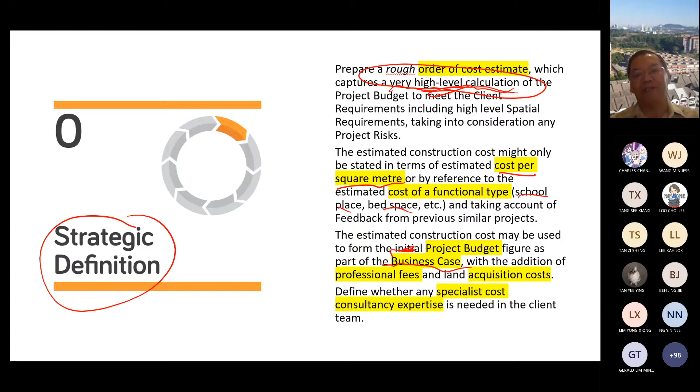What you need to establish is the business case—meaning whether the project can make money or not. That is the main consideration. This business case, also known as the initial project budget, is at the very initial stage, with the addition of professional fee and land acquisition cost, so your land cost needs consideration too.

Normally for a construction project, you need to employ consultants, so consultant costs have to be taken into consideration as well. I showed you this in the last lecture—a business case definitely has a gross development value, meaning the income, how much you can collect from the development.

Let's say a piece of land can complete 200 units of apartments, each unit worth 500,000. So 500,000 multiplied by 200 gives you 100 million. Then your development cost: land cost say 10 million, plus construction cost for 200 units, each unit needing 300,000 to complete.

So that costs you 60 million. Professional fees, assuming 10% of the construction cost, that's 6 million. Finance cost per annum at 7% works out to 5.32 million. All in, you add up to 81 million. 100 million minus your 81 million, so therefore you have a gross profit of 18 million.

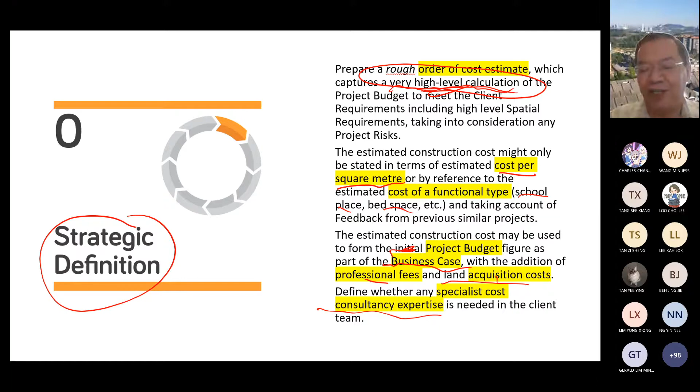During the strategic definition stage, a QS needs to advise the client on this aspect without any drawing. Bear that in mind. So that's why for the QS during this stage...

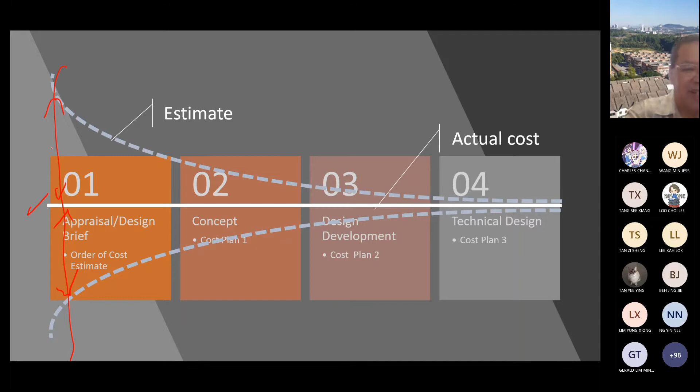If the solid line is the actual cost, at this stage the difference could be so much plus or minus. Why? Because the QS is making a guesstimate of what the land will be able to do. So differences from the actual cost are acceptable, it's common sense. If you expect a QS to give you the exact price at this stage, that's impossible, or you're asking a very naive requirement, asking a QS to do something impossible, or you don't know anything at all.

But as you get more detail, the prices get closer and closer. Finally, once you reach the tender stage, the actual cost of the building will be quite accurate. So the variance at this time, plus or minus even up to 20%, is not something strange. It is a very common sort of thing.

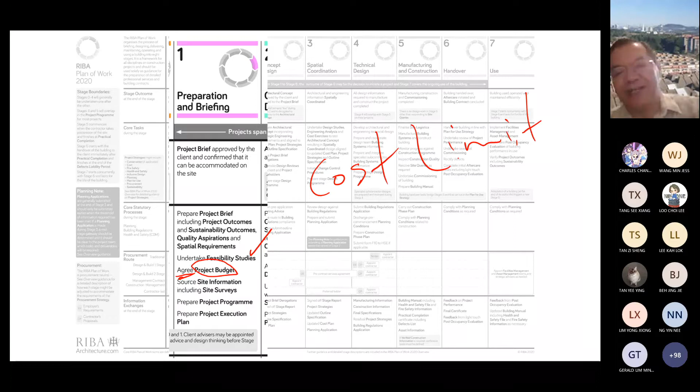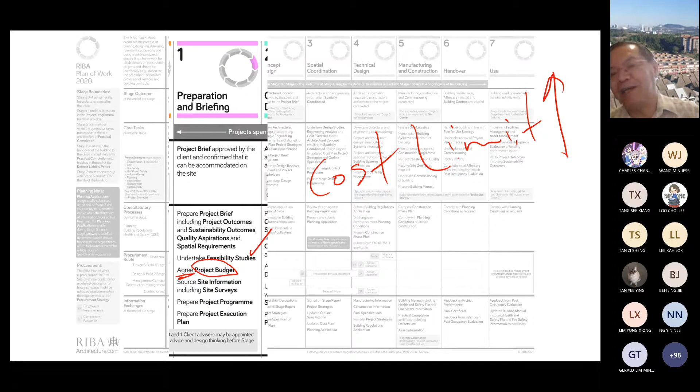This is an important concept: cost limit. That means there is a limit, the money the client has prepared to go ahead with this project. If you go beyond this, higher than the cost estimate or cost limit, unless you get approval from the client, otherwise your client probably doesn't have money to go ahead with the project. So what's the point of proceeding with the project?

So at this stage, your project budget needs to be more accurate, so we have to agree on the project budget at this stage. You also need to get various planning advice, pre-application planning advice. Planning advice here is related to the regulatory body, the government body, for whether your project can be approved to proceed or not. You have to know all the laws and regulations enforced during the time, so that your design is done according to the regulations.

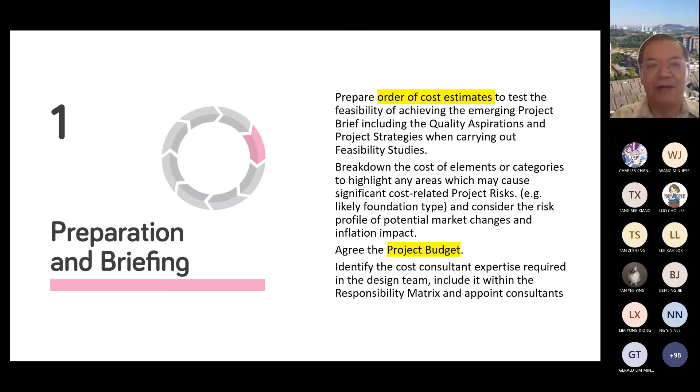Now, during this stage, you prepare the order of cost estimate - later we'll see what a cost estimate is. Then break down the cost by element or category to highlight any area which may cause significant cost-related project risk. You have to prepare the cost detail and consider areas where you can't be very definite about the actual cost. Importantly, the project budget needs to be agreed with the client, because that will set your cost limit. I hope you remember this term: cost limit.

Now, order of cost estimate, according to the new rules of measurement. I have uploaded the new rules of measurement in the reference sections. You can refer to the whole book for the order of cost for NRM1, new rules of measurement. For today's lecture, I need to refer to NRM many times, so probably you can try to download or open your NRM1 so you can compare my content with it later in the lecture.

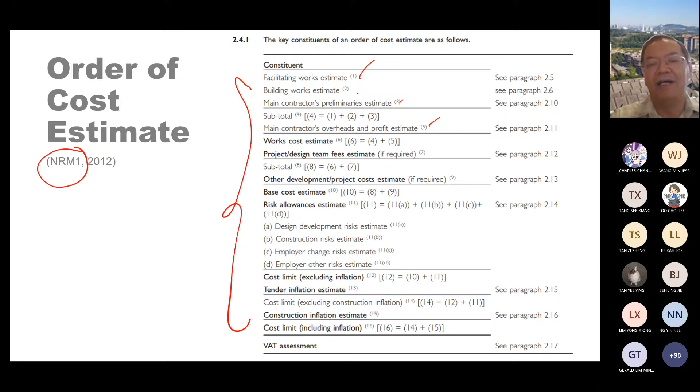The order of cost estimate includes items like facilitating work, building work, main contractor preliminaries, main contractor overhead and profit, etc. One item to note: the risk allowances. There are four different types of risk, like design development risk, construction risk, employer change risk, and employer other risk estimate.

If you remember this diagram, when you are in the earlier stage, the earlier you are, the risk component will be higher. But as you go to more detail, your risk will reduce, you will get more accurate. Therefore, in the initial stage, the risk allowance, the risk percentage, you probably need to allow for higher.

So this is the list you can find in the new rules of measurement. Now, following the same layout, I prepare the project budget. What you can see here is the difference between the project budget and the order of cost estimate: the project budget includes income, then we have a profit. We find the income minus the total cost limit. Remember, I just mentioned the word cost limit. Your income minus your cost limit, that is your total expenditure, gives you the gross profit.

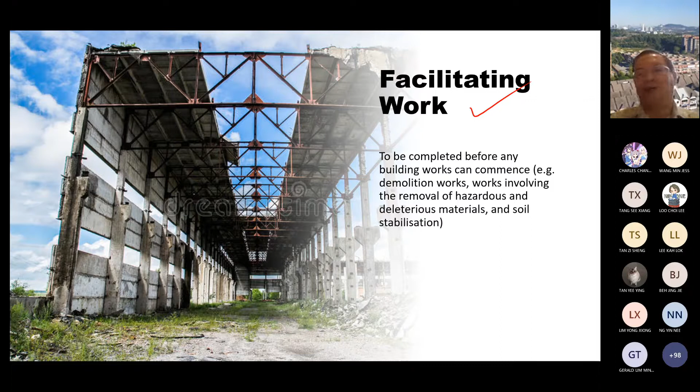Facilitating work is, after you get a site, before you start construction, you probably need to carry out some preliminary work on the site before you can actually carry out the construction. For example, if you buy over a site that has some building on it, you might need to carry out demolition work. As you can see on the screen, for these buildings there is an abandoned factory you probably have to demolish. This is called facilitating work.

Or on the site, you probably need to carry out some clearing, or earth filling, in order to level it up so you can carry out the construction work. Or there may be soil stabilization needed, or any hazardous or dangerous material you need to remove from the site. All of this is known as facilitating work.

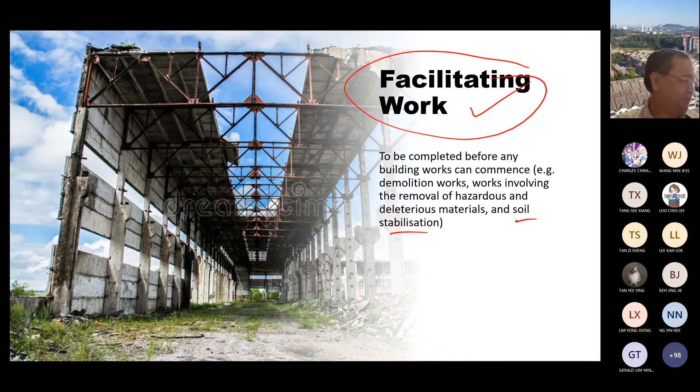Now then, when you come to the building work, normally there is an actual construction of the building. As I said earlier, one method is based on the floor area method. Floor area method is a very rough costing of how much is your built-up area.

For example, A stands for gross internal floor area, then b is cost per square meter of the gross internal floor area. So a multiplied with b gives you c, which is the total cost for the building works.

Alternatively, you can base it on the functional unit method. Like the example I showed you earlier, if this is an apartment that costs 300,000 to construct one unit, and there are 200 units, then 200 multiplied with 300,000 gives you 60 million. That is called a functional unit.

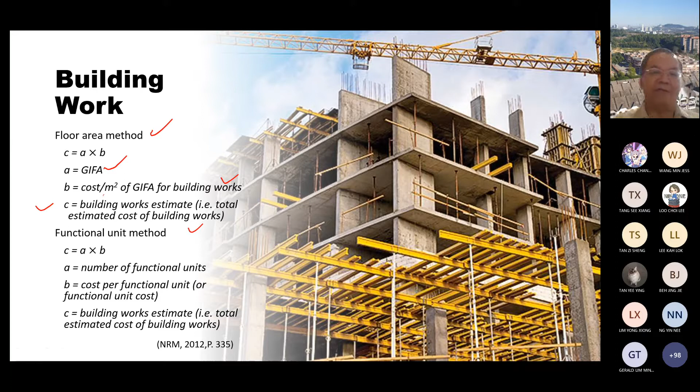For a hospital, we are probably talking about the number of beds. If that is a 500-bed hospital and one bed probably costs 10,000, then 500 times 10,000 gives you 5 million, something like that. So that is how you use a functional unit method or floor area method.

Now normally for this kind of information, as a QS you're supposed to build out your own library. So from now onwards, if you want to become a good QS, you should try to record all the projects you come across and all the information you come across, and try to categorize them, for example like this, into different types of buildings, and then how much is the cost per square meter. The more data you have, the better you are. If you can collect more information, then your estimate will be more accurate.

Otherwise, you have to rely on some of the standard costing published by some QS firms or institutions. For example, JUBM and Arcadis always come up with the construction cost handbook.

Okay, so you can go to the JUBM or Arcadis website and look for this document. Then you can download their

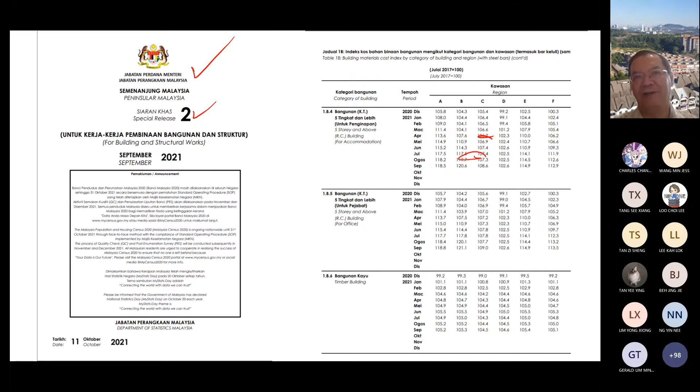One of the ways is we try to look for the construction cost index. Luckily in Malaysia, our Department of Statistics has a special release, whereby you can get all the different regions and different months, what are the index, the price index. So from the price index available here, you can make a forecast of what percentage you need to adjust for your new project. You can base on that.

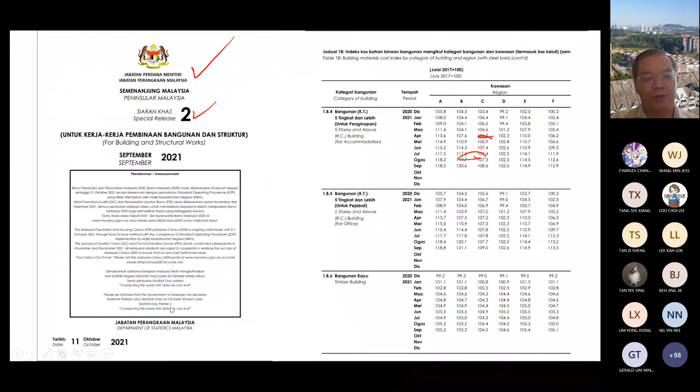Let me just show you. Do you know where to get it or not? Do you know how to get the special release? Anyone can answer me? Charles, is it Charles? Charles, do you know how to get the cost index or not? Yes sir. Do you know how to get the cost index or not? Kind of forgot already. Forgot already. Okay, now you can see my Google, isn't it?

Yes, search engine. So you go to the Department of Statistics. Department of Statistics Malaysia. Just go to Department of Statistics Malaysia.

Then you can go to the statistic on demand. If you go to the statistic on demand, can you see that? Statistic on demand, then you can see the e-statistic. All right, you click on e-statistic.

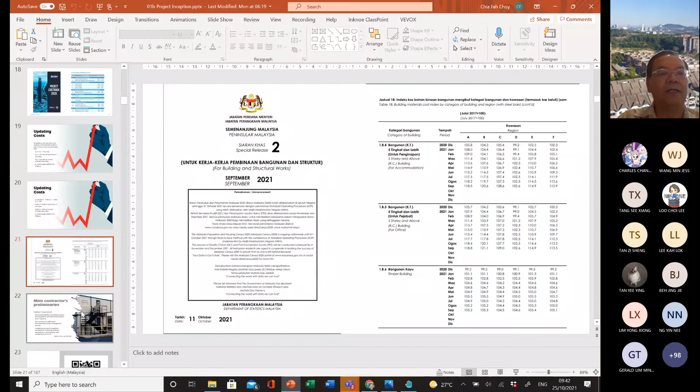So let me continue with the lectures. So that is the first thing, your main building work. The main building work, you refer to the standard building cost and then make adjustment for the price difference, because your base data and your current estimate time could be different. So therefore you need to make adjustment.

Now next is we look at the main contractor's preliminaries. Normally when a BQ, a bill of quantities, the first bill is preliminaries. So what are the items in the preliminaries? Now we have to look at it.

There are two parts. One is employer's requirement. The other one is main contractor's requirement. Now, what is the difference here? The main contractor's preliminary...

Why the main contractor's preliminaries have to consider employer's requirement: because for the BQ, the standard practice of the construction industry is, even though the site office is the client's site office, the main contractor has to provide the facilities. The main contractor has to construct the site office for the client's clerk of works to use. So that's why this is called the employer's requirement. Employer's requirement includes not only the site office, but also the furniture, and you also have to install, for example, the telephone, internet, all kinds of systems required in the office, in the site office, for the client's representative to work on.

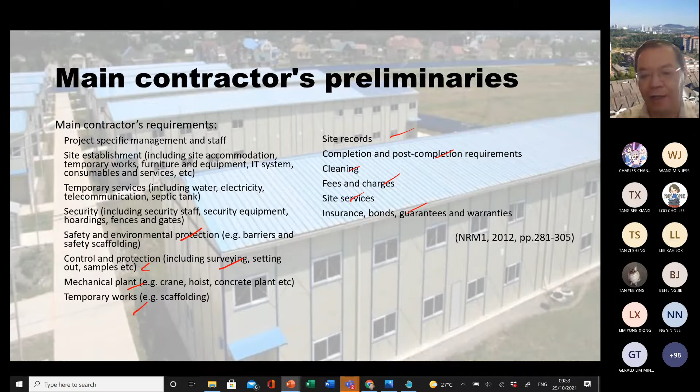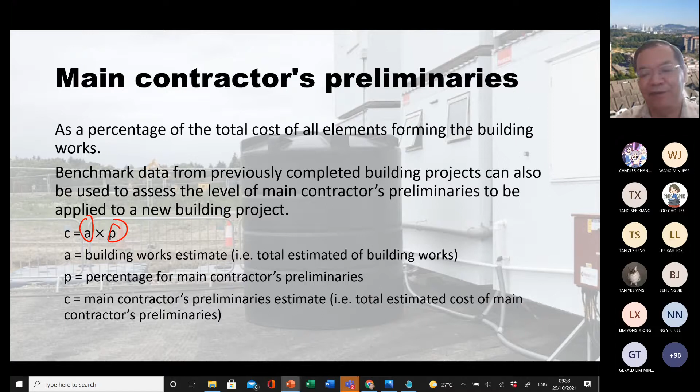And normally for all these costs, of course you can price very accurately, but for the initial stage, for the order of estimate, normally we will allot a certain percentage multiplied with the building work. So for example, you assume 5%, 10% as a preliminary, all right? Then that will give you the total main contractor's preliminary amount.

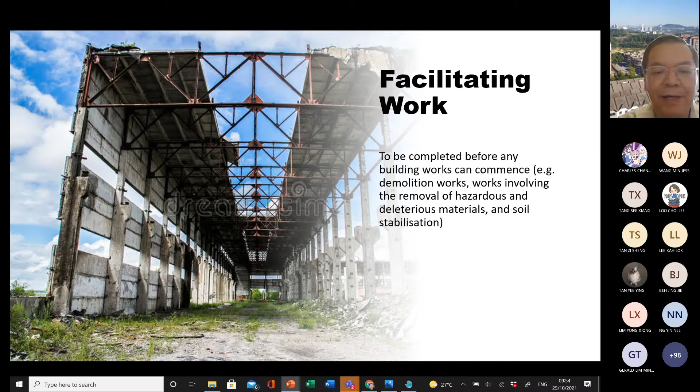All right, then what does it mean by the overhead? Overhead is normally the expenditure spent in the contractor's main office, head office. So probably there's a project director or managing director, or QS, all those are people based in the head office, but they are working on the project by certain time. So probably they visit the site quite frequently, once a week or once a month, or twice, or every fortnight, etc. Their traveling costs and the costs incurred - all these are the costs incurred as the overhead.

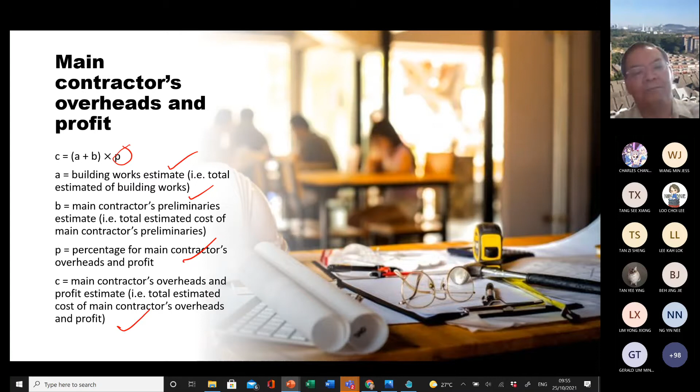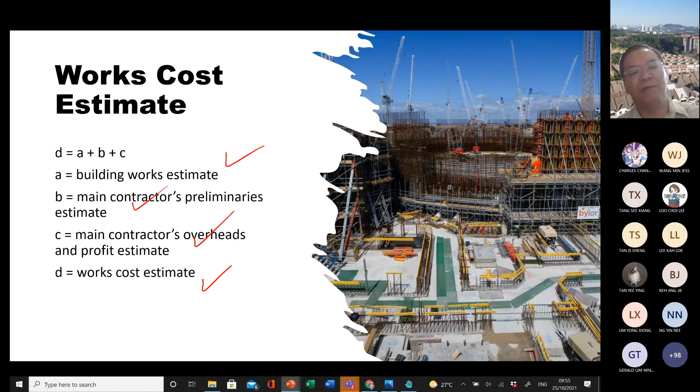So similarly, for the main contractor's overhead and profit, you are using the building works plus main contractor preliminary, then you multiply with a certain percentage. That will give you the total main contractor's overhead and profit estimate. So the total work cost estimate is equal to building works, preliminary, overhead - that will give you the work cost estimate, the total cost estimate.

Now besides that, for the development project, you need to get a consultant, a specific consultant to do the design, project, etc. So therefore it will incur a professional fee. So the professional fee is based on your work estimate D, then multiply with the percentage for the professional fees. So it could be 10%, 5%, up to you.

Now another important component is over here - there are other development project costs. Now, for those of you who have done development economics or property development, probably before your construction costs you have land acquisitions, etc. And then after you calculate your professional fee, etc., then you have your finance costs, marketing, etc.

But for the order of estimate, the land acquisition cost, employer finance, and also marketing costs, is excluded from the development and project costs. So please take note of this. Other than these three items, probably covered in your property development, there are other fees like planning permission submission, planning fees, charges, planning contribution, and insurance. So this will be the other development project costs.

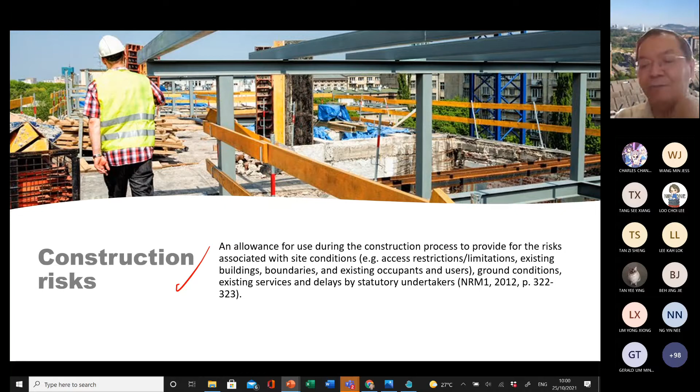Then construction risk, that is during the construction times. For example, after you start excavation, then only you realize that the soil conditions are very bad, so you need to replace the soil. Or after you start your excavation, then only you discover there are services underground and you need to divert all those services, etc. So this is considered construction risk, which means you can only know the risk once the construction has started.

The employer change risk could be due to the employer, the client changing their mind, so they want to change the drawing, you want to make some changes. So that is employer change risk.

And employer other risk, which includes, for example, the employer suddenly finding that it needs to expedite the project, or needs to postpone the project, because of the availability of fund, or also things like COVID-19 happening now. So probably the developer wants to delay the project because the sales are affected. So all this will fall under employer other risk.

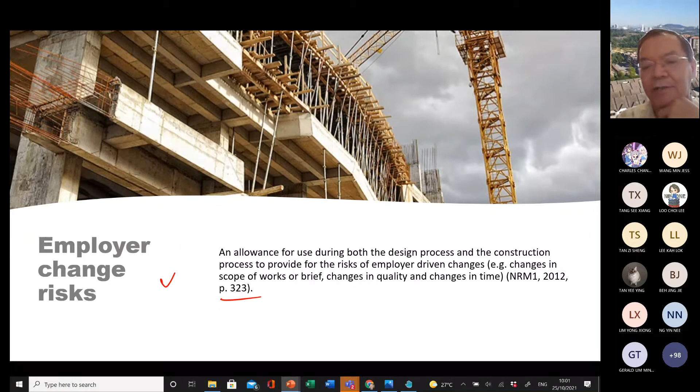And all these are more detailed. You can refer to the new rules of measurements. I've provided all the page references, so it's very easy for you to check the more detail.

Now all these risks are different kinds of risks. You have to add together the amount of each risk, which will give you the total risk allowances. That is the design development risk, construction risk, employer change risk, employer other risk added together, that will give you the risk allowances estimate. So the base cost plus all the risk will give you the cost limit.

Now these cost limits are excluding inflation. If you have listened to my lecture carefully, you'll notice that just now when I say the price adjustment, it is only adjusted to now, when you are preparing the order of cost estimate. So you are only looking at now and the base index, what the price difference is. But from now till the drawings are ready or the tender is ready to call, then there is still a period of time. It could cost, during this period of time, the price could increase or decrease. So therefore it will have a further inflation.

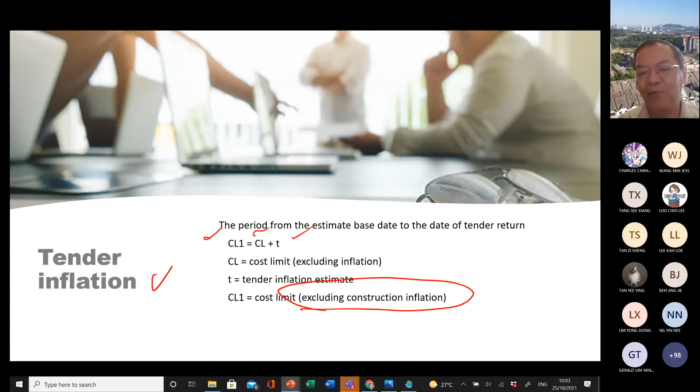And this new cost limit is still excluding construction inflation, which means once your project is awarded, during the construction times, probably the price is further increased. So therefore you will have a further increase on the construction cost. So you need to use your cost limit 1, the revised cost limit, plus the construction inflation, in order to get the new cost limit with construction inflation.

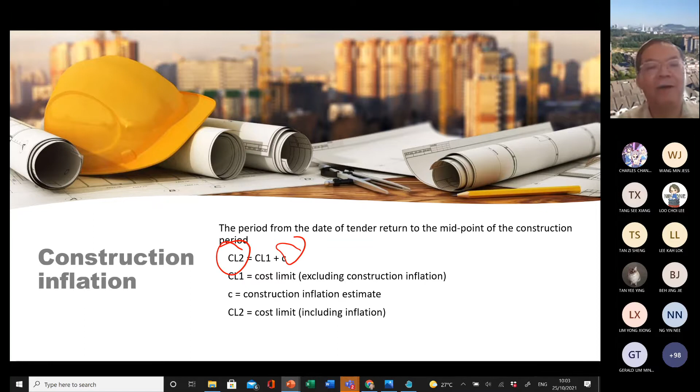And normally, when you prepare the order of cost estimate report, these are the information you need to include in the order of cost estimate report.

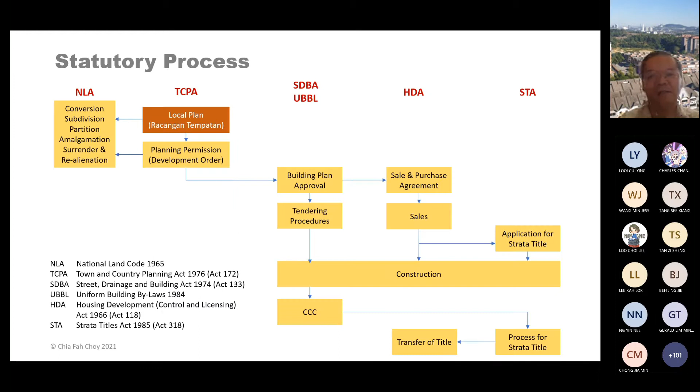So all the submissions you submit must comply with the local plan. For example, you comply with the plot ratio, you comply with the land use zoning, etc.

Now, the legal power, the sources of the power for the local government to exercise the power to approve or disapprove any submission for development - that power is granted under Town and Country Planning Act 172. Please take note, Act 172 is the source of the power. Why does the local authority get the power to approve the drawing? That is based on this law, Act 172.

Act 172, clause 18, says that no person shall use or permit to be used any land or building otherwise than in conformity with the local plan. So that means, for example, whatever development you need within those areas in Subang Jaya, you need to comply with Rancangan Tempatan Subang Jaya, the local plan.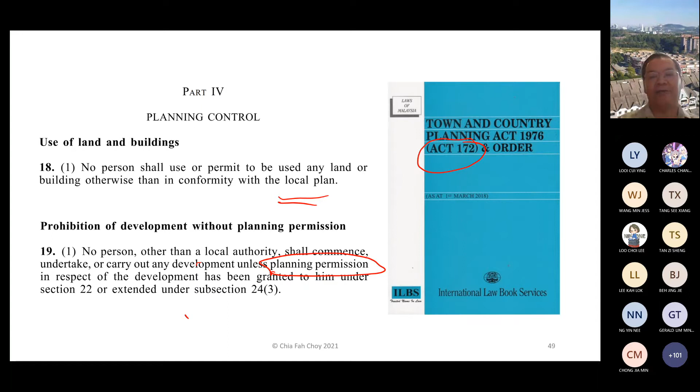No person other than the local authority shall commence, undertake, or carry out any development unless planning permission in respect of the development has been granted to him under Section 22 or Extended 24(3). So you need to apply for planning permission before you start to carry out any development.

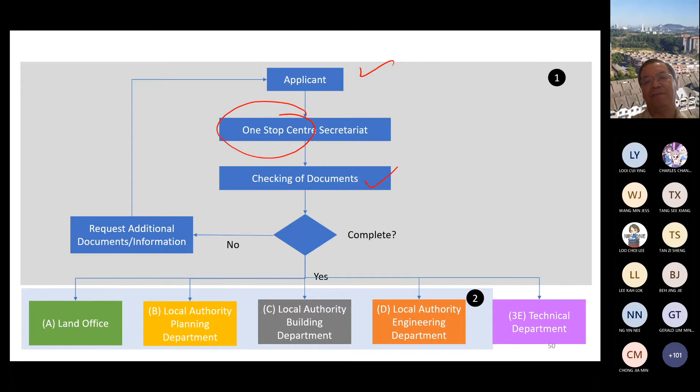Now these are the procedures, the sequence. What we have now is a so-called one-stop agency, one-stop center. This means once you want to propose any development, you submit all your documents to the one-stop center secretariat. The secretariat will check through all your documents, whether you have a complete submission or not. If complete, then proceed to the next stage. If not, you have to prepare the additional documents and submit again.

Previously, without the one-stop center secretariat, applications needed to be submitted to different places, different authorities. But now with a one-stop center secretariat, you submit to one center only, and that center will pass your information to the different departments for approval.

Now, once it's complete, it moves to the next stage. The next stage involves the land office, local authority planning department, local authority building department, and local authority engineering department.

The technical department is not inside the local authority, meaning they are not in the local government. They are separate, like the technical department including BOMBA. BOMBA is not part of local government, so probably that is under the national level, or JKR or JBA. So those are the technical departments. They fall under Minister of Work, so they are not under the local government. Over here you have a federal government authority.

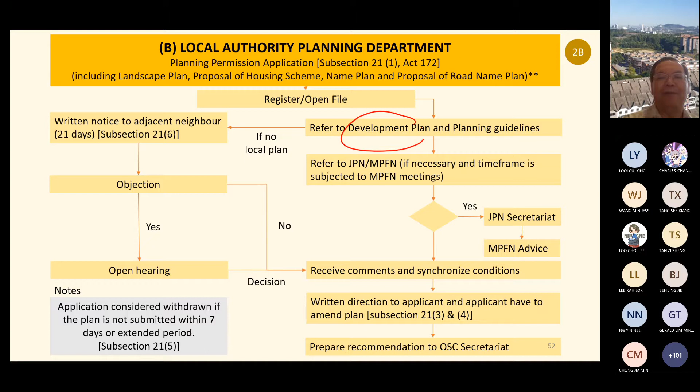Now, for the local authority, you know that it will be involved with the planning department, building department, and also technical department. So this is involved with the planning department. In the planning department, normally it is for you to apply or submit your development plan. Development plan is not the detailed building plan.

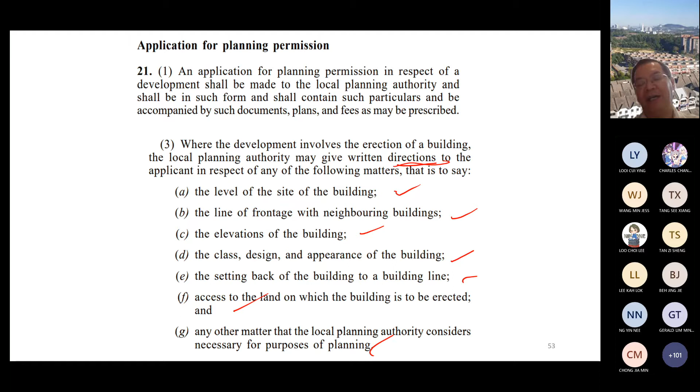The planning permissions, the local authority has the right to give certain directions regarding the development. For example, the level of the site of the building, the line of frontage with a neighboring building, the elevation of a building, the design and appearance of the building, the setting back of the building, and the access to the land on which the building is erected, and any other matter. So whatever your design is, the local authority has the right to interfere on the design of this aspect.

That is granted under Act 172. Local authority has the power to ask you to limit the level of a building, to limit the elevation of the building, to change the design of your building, etc. So they are quite powerful in this respect.

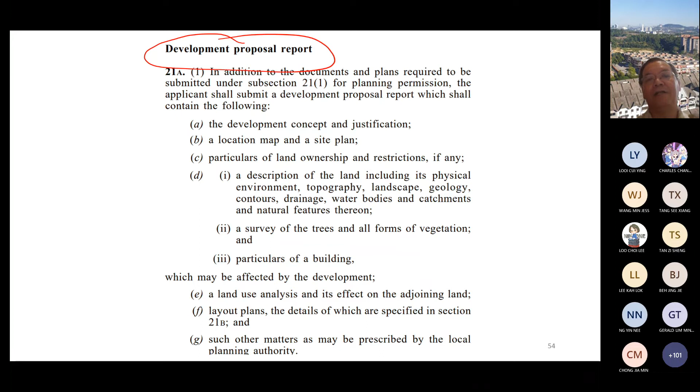Now, just as I said, the first department you submit to is the planning department under the local authority. For the planning department, you need to apply for the development order, or development proposal report, to get approval of the development order, which we call DO. Normally you have to submit your development proposal report, which will involve your development concept, location map, and site plan. Location map and site map, take note, are two different things.

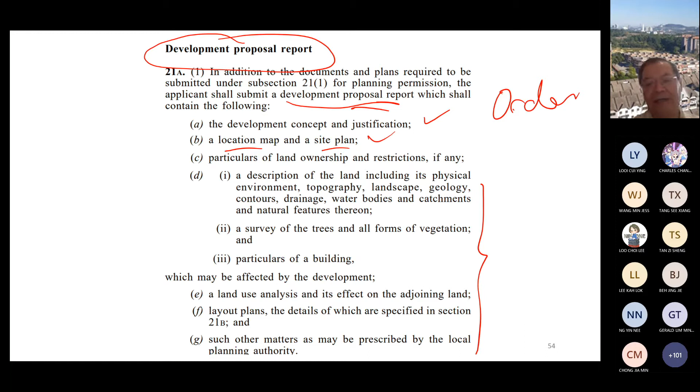Then probably some information regarding your neighboring land, their uses, what is the existing building or facility available on the neighboring lots. You also need to submit the layout plan of your development, which may include the following items, which I'm not going to read one by one. You may go through that later.

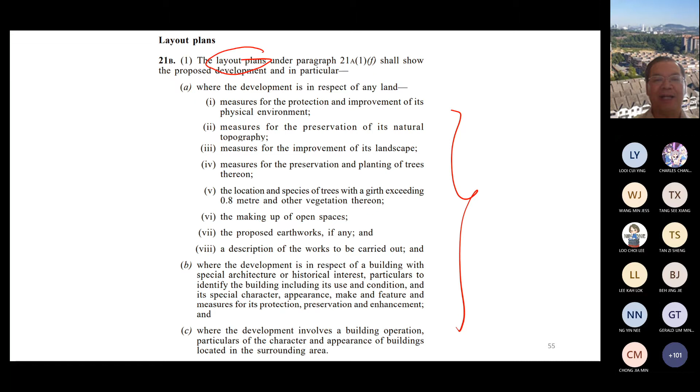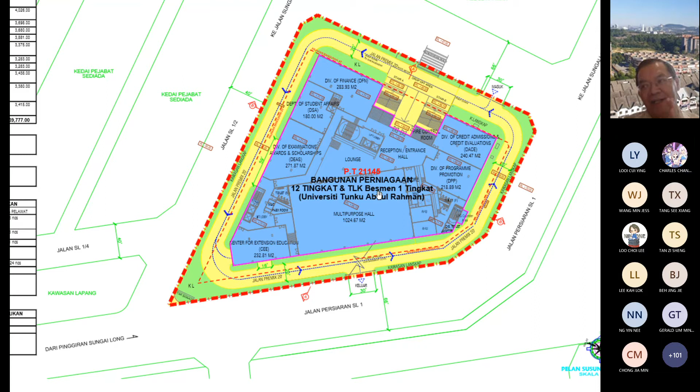Here is your proposed site, the new site you need to construct, and some layout of the building. But bear in mind, you don't need to have a complete design during this stage when you apply for the development order. But you need to know how many levels, how many stories you need to build, and what is the area of each block. So you need to provide the detail. Let me show you in the next slide.

For example, here we have a basement, sub-basement, ground floor, and level 1 to 10. Each of these levels has functions. For example, level 8 is for the staff. Level 1, 2, 3 is for the lecture theater and the tutorial class. And each level has its floor area, the gross floor area, and total.

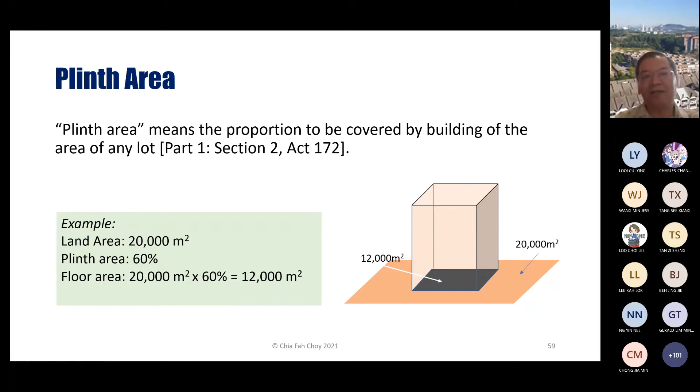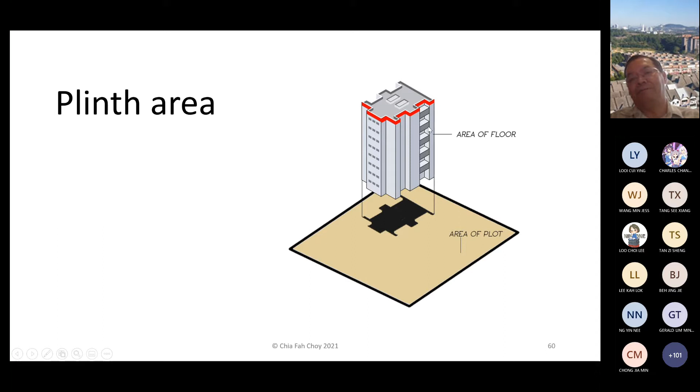But to calculate plinth area, it's not only the ground area. For example, your balcony you need to include as well. The ground floor doesn't have a balcony, correct? But the upper levels have balconies, so therefore the balcony area needs to be included. And if you have any projections of the roof, it needs to be included as well.

To be more exact, the best example is this building - the Expo Shanghai China Pavilion. You can see the top part of the building, other than the roof level, is the biggest, and the ground floor is the smallest. It's inverted - normally the normal design has the base bigger and the top smaller. So this building is different.

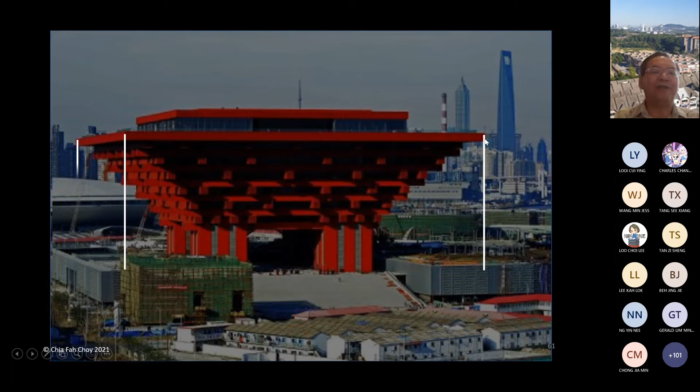So how do you calculate the plinth ratio? You have to take the extreme edges of the building, draw a line dropping down perpendicular to the ground floor. This is the ground floor land. So the plinth ratio equals this area divided by the total land area available, not just the ground floor area. That is how you determine the plinth ratio.

Can you understand this part or not before I proceed? Any questions? No, sir. Thank you, Charles.

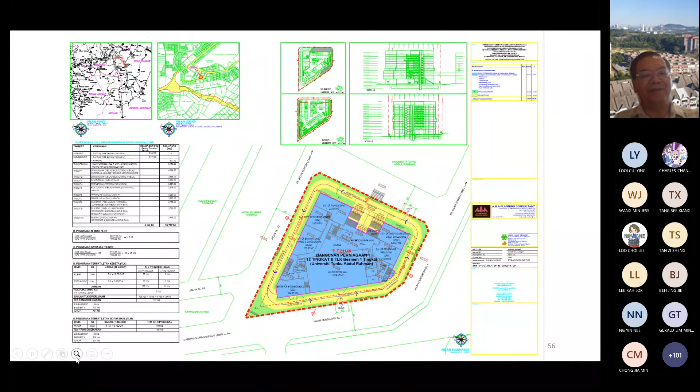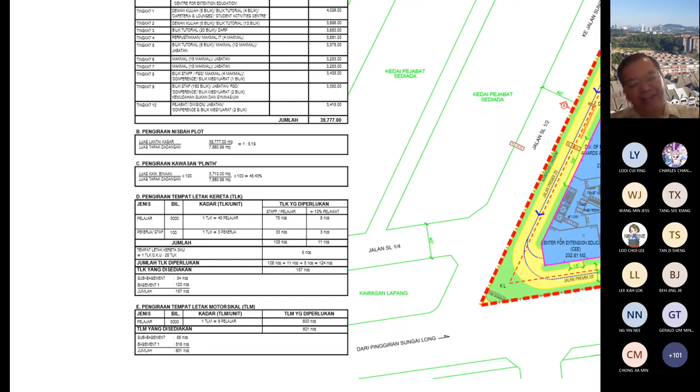So that is the plinth area. Then, of course, during the submission, just now I covered this part. Now I'm going to cover this part, which is like, for example, your provision for the car park - how many car parks, motorcycle parking area, etc. So you need to do the calculation as well.

For example, the requirement here is 3 workers need 1 parking lot, and 40 students need 1 parking lot. You can imagine the reasons why parking lots are so limited. Every 40 students, 1 parking lot. I believe now probably every 4 students have 1 car. Who knows, probably every student has a car. That is the reason why parking is so short.

But that is the requirement under the law - 40 students provide 1 parking lot, 3 employees 1 parking lot, 3 staff 1 parking lot. But actually, if you look at even the estimating of the number of staff...

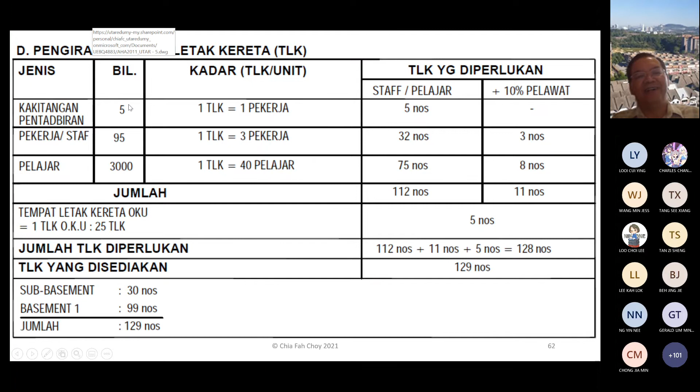Estimating the number of staff is also very underestimated. Just the Department of Surveying alone has more than 30 staff, not to mention other engineering courses. I think just FES alone has about 200 staff, so this is underestimated by 50%. Then for our Block B, student numbers are something like 10,000, but actually our planning was only for 3,000. So that's why our lifts are always congested.

Then our parking is also always not enough. But anyway, that is our submission for approval of the building. This is a motorcycle area. There are plenty of motorcycle lots actually, a lot of motorcycle lots are not used up, but the motorcycle parking area is being used to park cars in our KB block. You can see that.

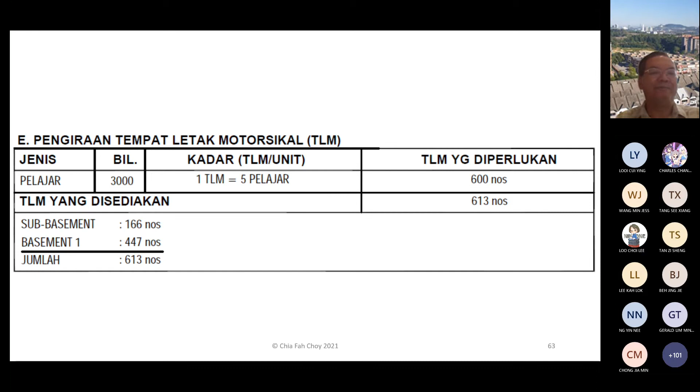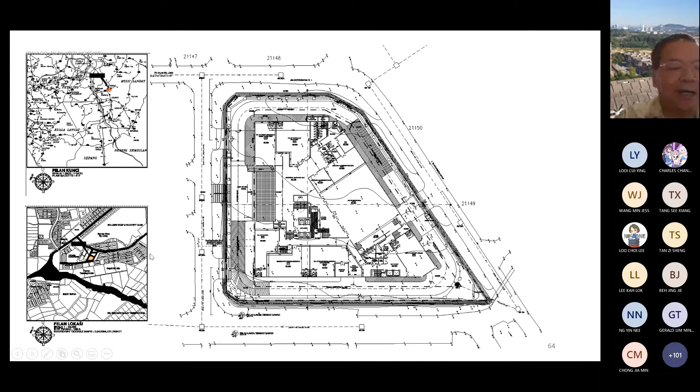So this is a key plan of the site. This is a location plan, and this is the site plan. Please take note what is meant by a site plan and what is meant by a location plan - these are two different plans. So that is a site plan, and this is a location plan.

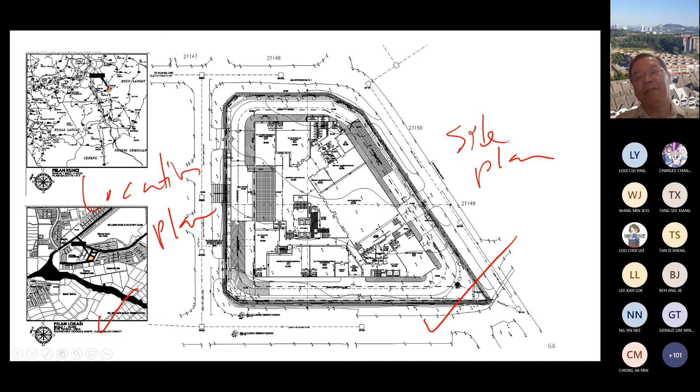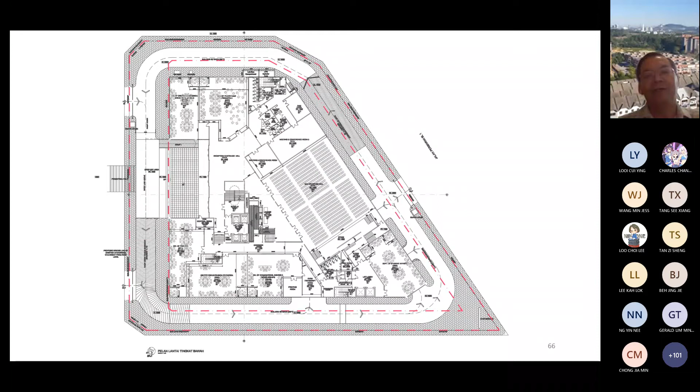Now, once the development order is approved, you can start to prepare the more detailed drawings to submit to the local authority building department. For the building department, you prepare your detailed building plan, which needs to comply with the Street, Drainage and Building Act 1974 (Act 133), or the Uniform Building Bylaw. So for example, in the drawing, this is the ground floor.

Then you have your first floor, then probably every floor - second floor, third floor. Let's say from the fifth floor to the highest floor has the same layout, then you can have what we call a typical floor plan; you don't need every floor plan. For our case, every floor is different, so we had to prepare a different plan for every floor and submit it for building approval.

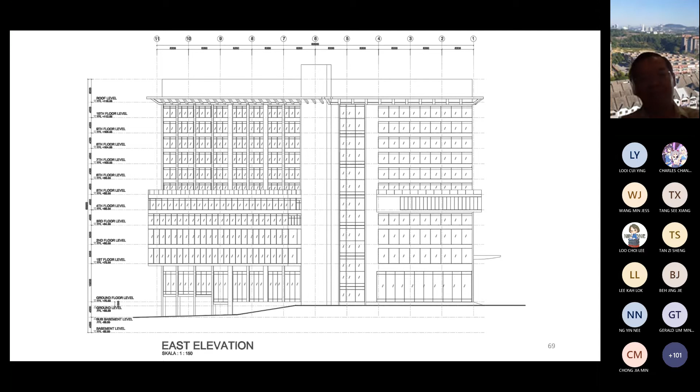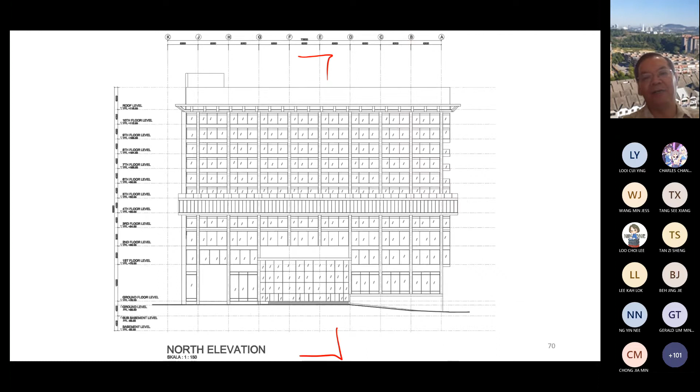For your building approval, you also need elevations - north, south, east, and west elevations. But here I only show you the east elevation and the north elevation; I didn't show all the other elevations, or the sections. For the section, one is along the x-axis, the other along the y-axis. You need to provide the section drawings as well to get building plan approval.

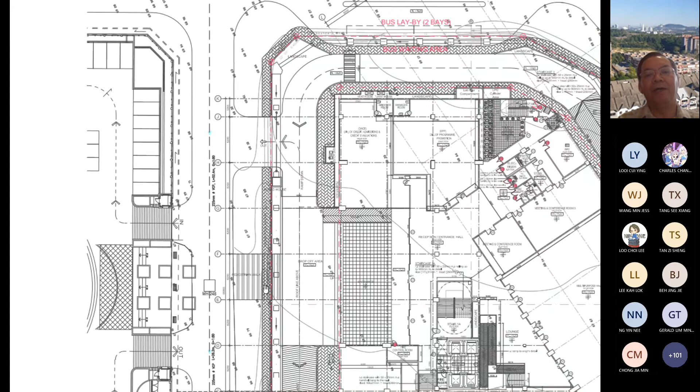Other than that, your building plan submission should also include other infrastructure, like road and drainage. So for example, here in our case, you can see the bus lay-by, the sump, all the perimeter drains very clearly, and also the road - this is the road work, and this is the drainage. Can you see that? This is a drain, this is a road work.

So any road work and any drain needs to be submitted to the engineering department under the local authority for approval. Then for technical departments, like JKR, this will involve approval of the main road and main access road. Like for example here - so because this is our building, where is our access road? How are we going to treat the main access road? This will need approval from JKR.

And also for water - internally this is the sump, but finally you need to join with the main sewerage, or the main water pipe. So for example here, how you connect to the main line, like the manhole, the sewerage manhole, how you connect to the main sewer line - this is the main sewer line. So this kind of detail, you need to get approval from the technical department.

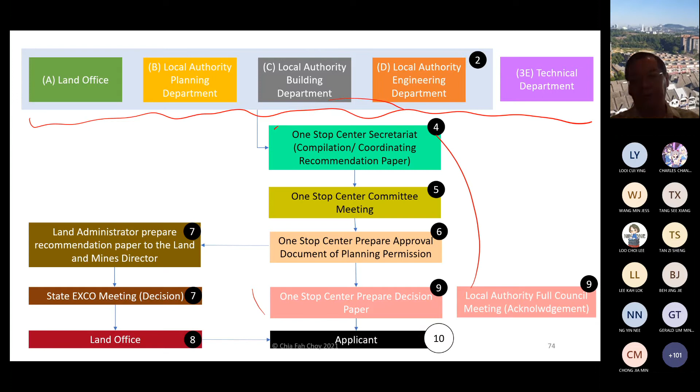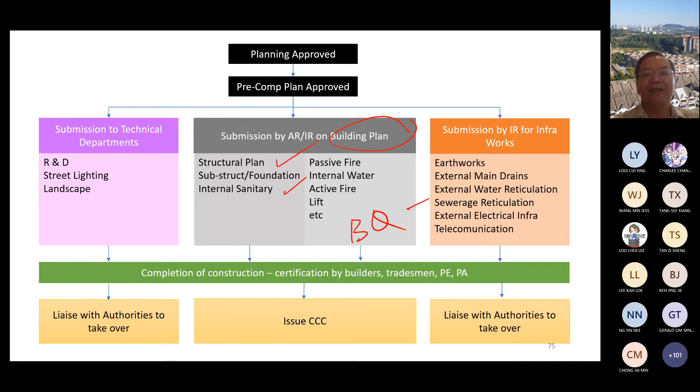Once all those get approved already, the one-stop center secretariat will conduct a meeting, and after the meeting they will grant the permissions - the planning permission, the approval of the planning permission. Then only can the contractor start to prepare more detailed things like the structure plan, internal sanitary, and all other building plans for approval. Once these are done, the detailed BQ can be prepared and the tender can be called. After the tender, construction starts.

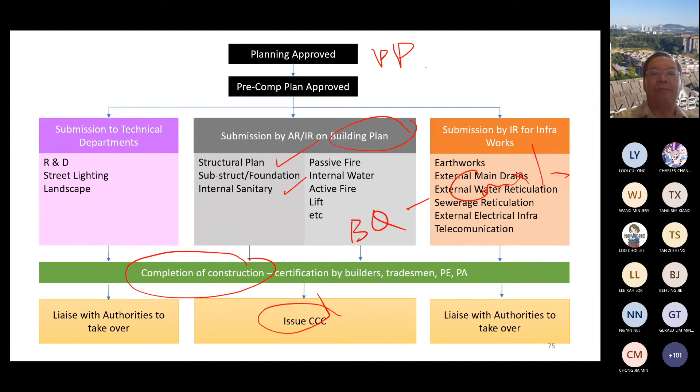After the construction is complete, then you start to apply for the CCC, Certificate of Completion. Now, once the building planning permission is approved, another thing is you can apply for the Pre-Comp Plan.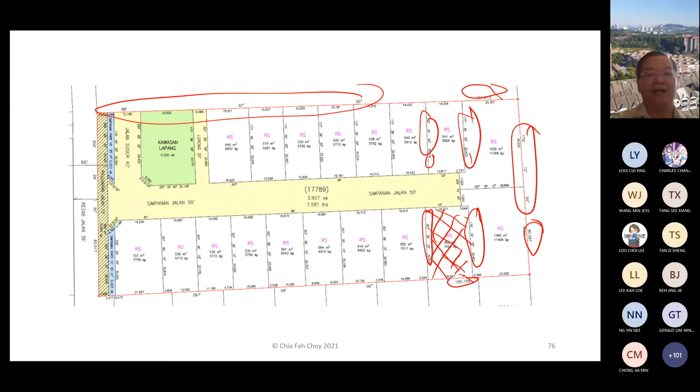That is what it means by pre-com plan. You can apply for the pre-com plan because normally, let's say this is your original site. If you are constructing so many buildings, then you have to issue the title to the different buyers. So you need to have a pre-com plan.

In order to carry out the developments, of course the developer needs to apply for the developer license. That falls under Act 118, the Housing Development Control and Licensing Act. You need to apply for the license under Act 118.

And just as I mentioned, let's say for your land, you need to apply for the strata title for the individual buyers. So for example, let's say this is our site. Strata title will be something like that - you divide the land depending on how many units. Let's say how many units I have here.

1, 2, 3, 4, 5, 6, 7. Let's say the piece of land I construct 49 units. So therefore each unit of the buyers or the owner will have one share of the land, something like that.

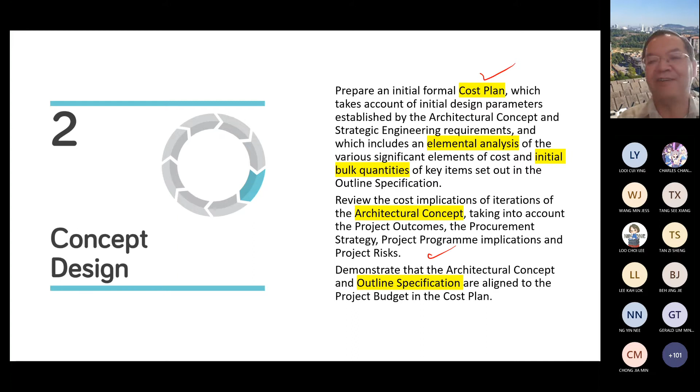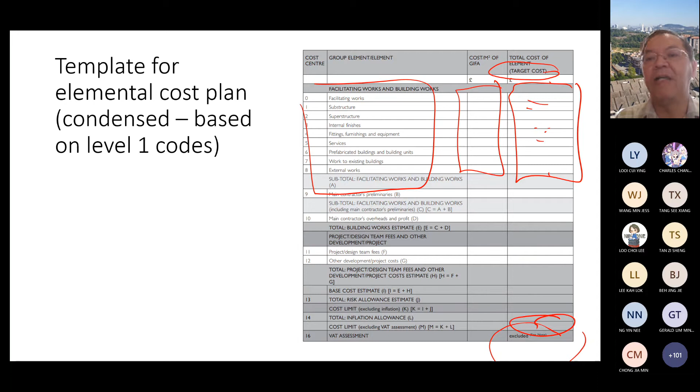Now this is the example of the cost plan, in the new rules of measurement, the format of a typical cost plan. So you have the main element, then the cost per square meter, and then this is the total cost. Each of the total cost, each element amount, is known as the target cost. Cost limit is the total development cost - we call this a cost limit. Cost target is the breakdown of the cost for different elements - we call that the target cost.

Now, in order to prepare the cost plan, normally we will use a completed project. Then you carry out the elemental cost analysis - you prepare the elemental cost analysis, then you apply it to your new proposed development. Of course, you can have other information, like for example your new design and updated costs, in order to prepare the cost plan for your new project.

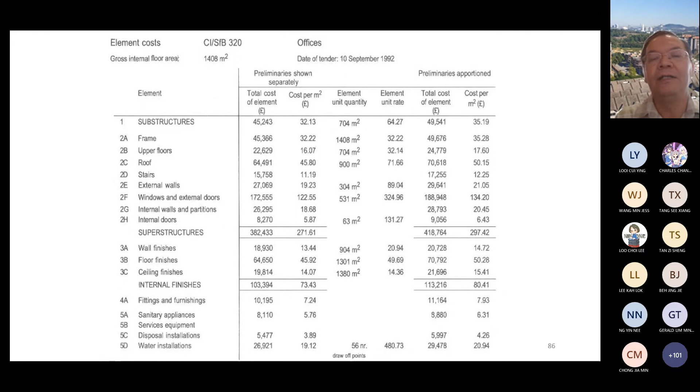This is the example from the textbook of a typical cost analysis. You may go through that. What you need to include in the typical cost analysis is elemental cost analysis. Normally we make use of elemental cost analysis to prepare the cost plan. Now this is what I have worked out with the Excel file.

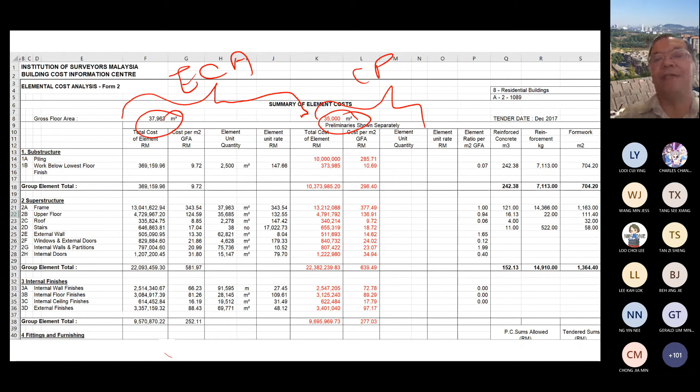So for example, this part is the ECA, and this part will become my cost plan. The cost plan is based on the new floor area, while the existing cost analysis is based on the drawing, the floor area of the existing drawing. The new area here is my proposed new area.

So all these documents I have uploaded in the files, I'll show you in a short while. Now, initially your rough cost estimate is probably here. So if you're using the cost plan to prepare, your new costing will be here. Then your accuracy becomes more accurate, getting closer to the target with the cost plan prepared.

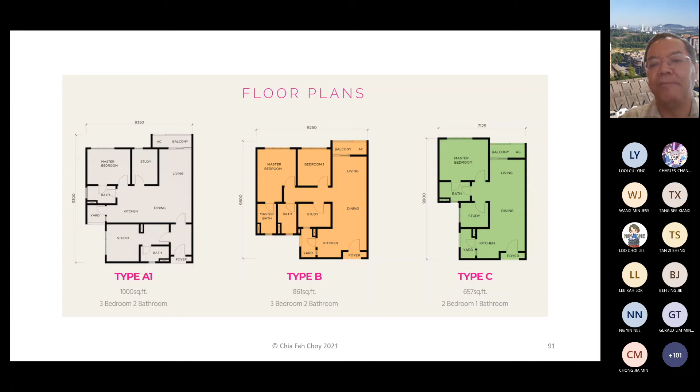Now the next few slides show the LOD 200 drawing, so we expect you to prepare until this level of detail for your assignment purpose. Then this is the brief specification of your design.

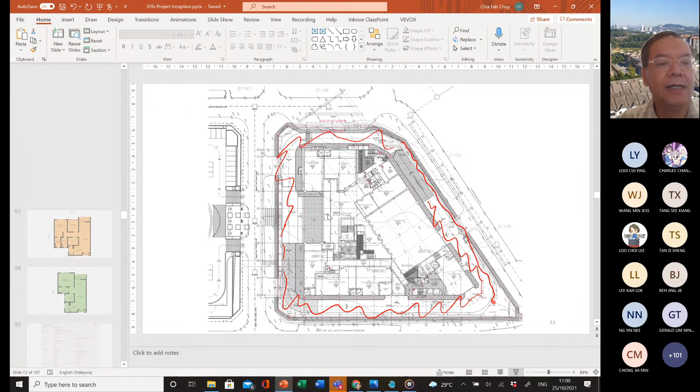Let me check. All right. Yeah, I suppose I have another quiz. Never mind, it's not here. Now just take one or two extra minutes.

Let me show you what I prepared in your lecture. So you will have your files. If you go to the file for today's lecture, you can see there is ECA, starting with ECA. That is an example of the existing buildings. So you use the existing buildings, your previous project, to prepare into this format.

Now, my original file is prepared with Excel, but I'm not going to give you the Excel file because I want you to learn how to make the formula by yourself. If I give you the Excel file, you will never learn how to use a formula in Excel. So you are expected to provide all the formulas for the calculation in the Excel format.

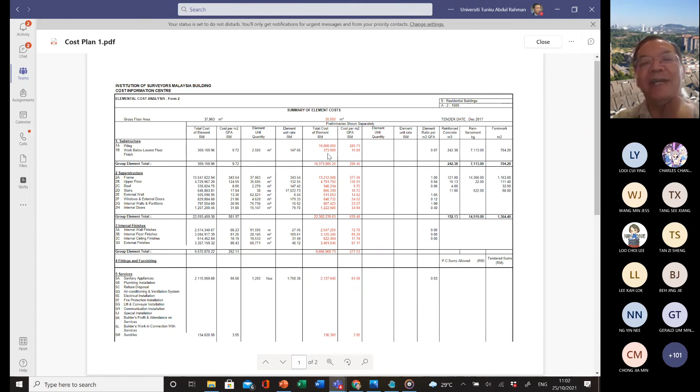So that is your cost plan, your elemental cost analysis. Step 1 is elemental cost analysis, which for your proposed building you can see over here is your proposed buildings, and over here is empty. Then the next one you will have your cost plan 1. You can see those are inserted with the red color. So once you know what are your new building, the area, and all those things, then you can start to fill in and make adjustments.

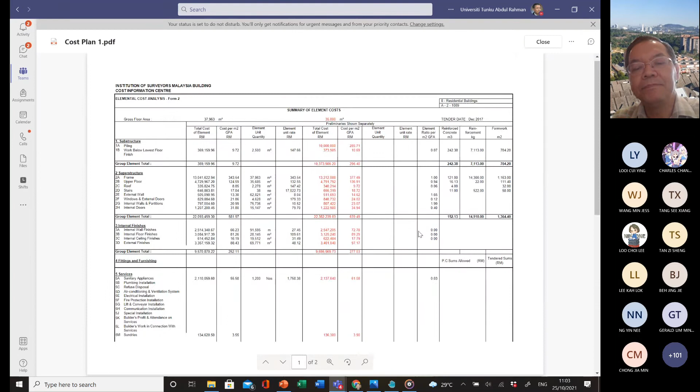Then after I have more information, I come up with, like just now, the cost plan. Let me show you again. Take note here, cost plan. So now down here, my revised cost plan is 1,289.01, after I have prepared and got a more accurate figure, 1,289.01.

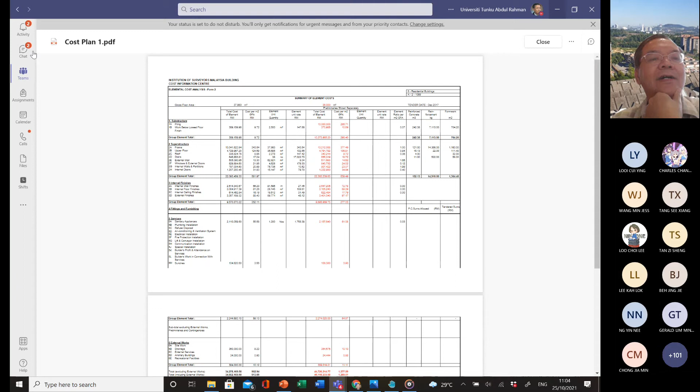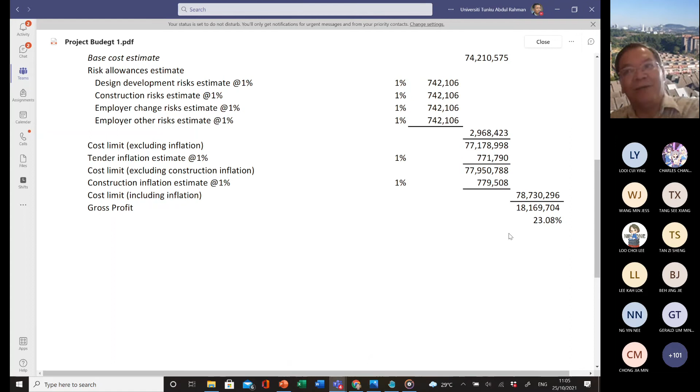So therefore now my next item, my new project budget now, can you see that? I updated to 1,289, no more 1,300, so that is a new price. And then my total cost limit now is 78 million, no more 79 million, which means I'm getting more accurate. So therefore we will keep changing this figure, and as a QS, along the consultant designing the building, the QS needs to keep updating their design and their project budget.

So there's no limit to the project budget and cost plan you need to provide. Probably for your project or assignment, we'd say you need to provide at least 3 copies of the cost plan, or 2 copies, etc. But in reality, whenever there are any changes, you need to update your cost plan and revise your project budget as it goes. All right, so that's all for today.

Tomorrow I will continue with some detail on the requirements of accommodation design, like for example your setback, the size of the building, etc. I will go into more detail on that, on the architecture aspect. So with that, I end today's session. Is there any questions?